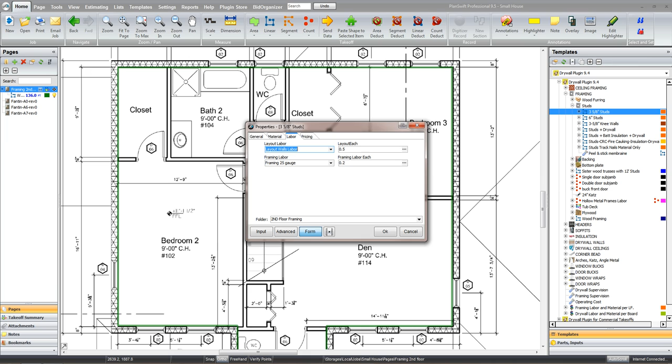I'm going to use this 3 5/8 assembly and name it interior walls. The walls are 9 foot, the studs are 9 foot, 16 inches on center spacing. I'm going to use a default track and studs, and the labor at 25 gauge. Click OK, and I'm going to digitize the walls.

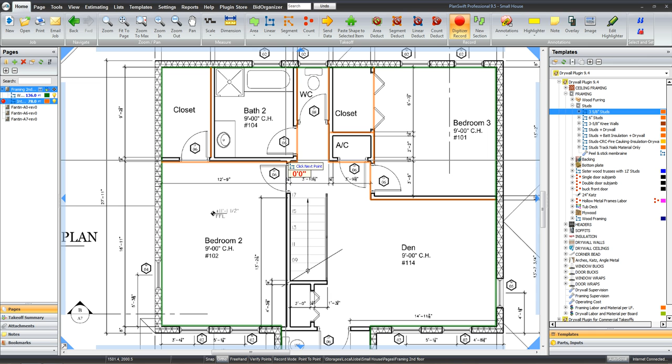With PlanSwift 9.5, we can use a digitizer, a linear or a segment. By double-clicking, I can just go here and make this a segment takeoff. Left-click, double-click, left-click, double-click. Or I can just do a linear takeoff if I want to go around the whole thing. Hit my escape button, and my framing takeoff for the studs is done.

Now my backing - I'll expand the backing folder and grab the backing material assembly. Click OK. I'm going to digitize the sink here where I need some backing, and the vanity here, and that's the end of my backing.

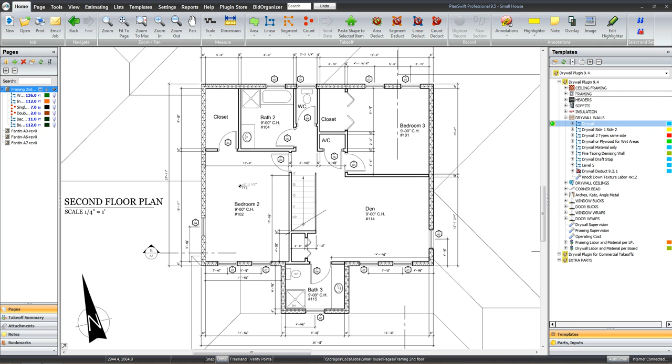Now I'm going to do my drywall and my walls. I'll click on this green start button, record button, and drywall. I'll hit home - let me just say that's my drywall walls. Let me click back here.

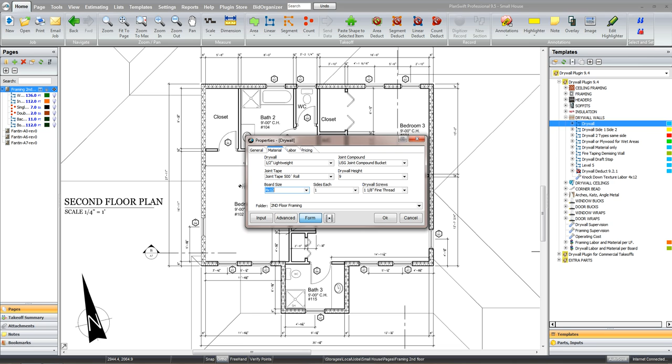Walls, drywall walls - the material, let's say we're just going to use 1/2-inch lightweight drywall. I'm going to use a joint compound, USG joint compound bucket, 500-foot roll of tape. I'm going up 9 foot with the drywall, 4x12 sheet, and I'm going to use one side. So I'm going to click OK, and I'm ready to digitize it.

If I go down here to my record mode and click point to point and turn it to box, I can just do it really fast and go into each room that is either a square or a rectangle. I can use this box tool.

Now I'm going to turn it back to point to point so I can go around this living room or den area.

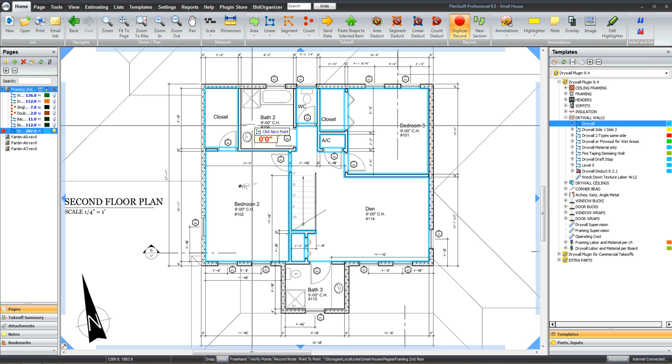I didn't go into the bathrooms because there's different board used in the wet areas. Double click to release that. Now I have my 2 bathrooms to do, so let me go in here and look at this bathroom.

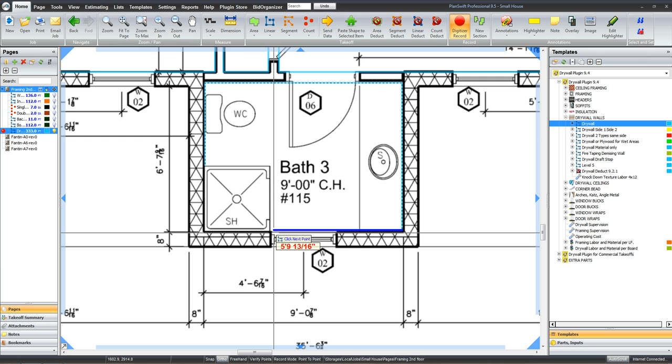I'm going to start here with regular board, the 1/2-inch lightweight regular, and just go to the tub. Then I'll do the same thing with this bathroom, starting at the shower with regular board. I can either use DensShield, Durock, or moisture resistant board in the shower wet areas.

So I'm going to hit escape and go over here. I have an assembly that's drywall or plywood for wet areas, so I'll just use that one and call it drywall wet area. The material is going to be the 1/2-inch Durock in the showers.

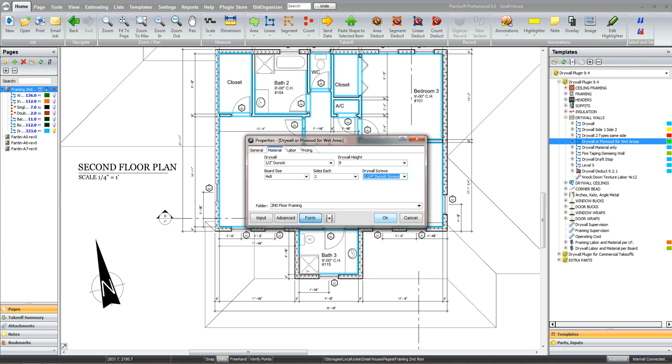So I'll pick 1/2-inch Durock, going up 9 feet, 4x8 sheets, doing one side, with Durock screws. I'll do this in my wet areas in the shower, and the shower here and the tub.

Hit escape, I'm done doing my drywall. Another 6 or 7 minutes. Now let me do the drywall on the ceiling.

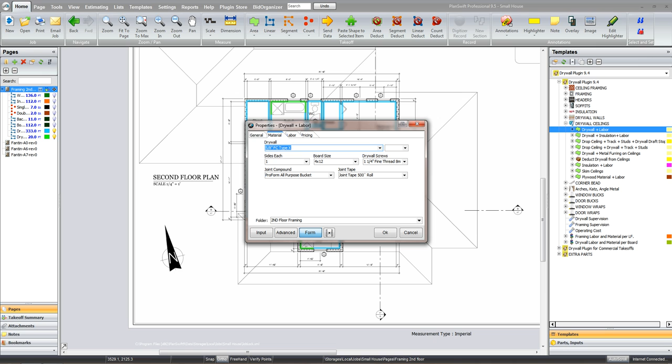We use this assembly here, drywall and labor, and I'm going to change the name. I'm going to name it ceilings, drywall ceilings. I'm going to pick 5/8 type X for the ceilings, and all this is right, so I'll click OK.

I'm going to turn off this box and put point to point again, and then I'm going to just digitize the whole ceiling at one time. Double click, I'm done. Now I'm done taking off my drywall.

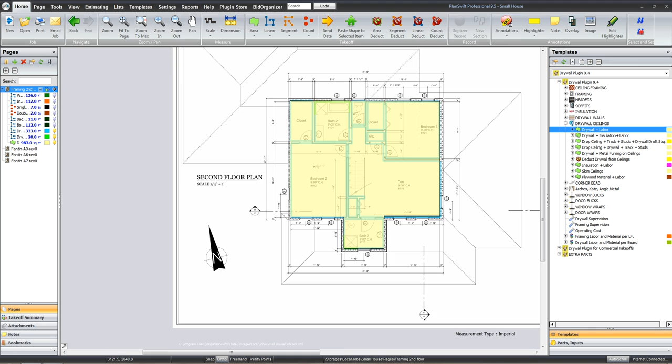So here we are, 12 minutes into this video, and I've done my furring, my metal studs, and my drywall, and I'm done with this takeoff. Now let's take a look at the reports and how they work, and how I can break all this material into different folders.

I'm going to click over here to my estimating tab, and I forgot to make a drywall folder to put all this drywall in. So I'm going to add a new folder, click new folder up here, and I'm going to say second floor drywall.

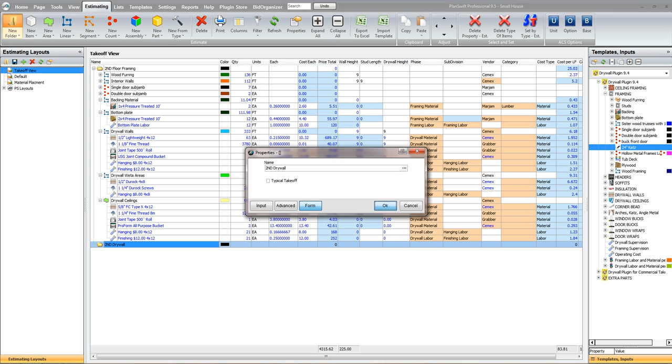Now I'm going to drag and drop all these drywall parts into this folder. I should have done this when I started the digitizer before I did the takeoff — it asked me what folder I wanted to put it in. I like to put them into folders because now I can do my reports.

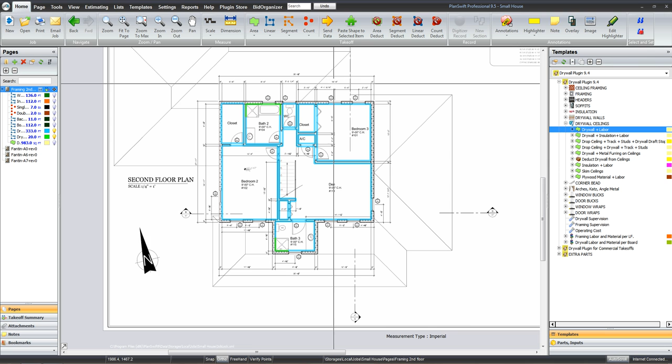And you can just go through and use all of the parts. I didn't use any corner bead in my Drywall Takeoff, but you can. I'm trying to keep this video short in time, but let's just take a look at the corner bead real quick.

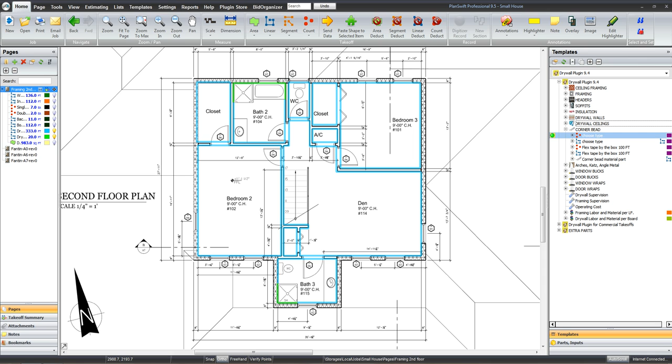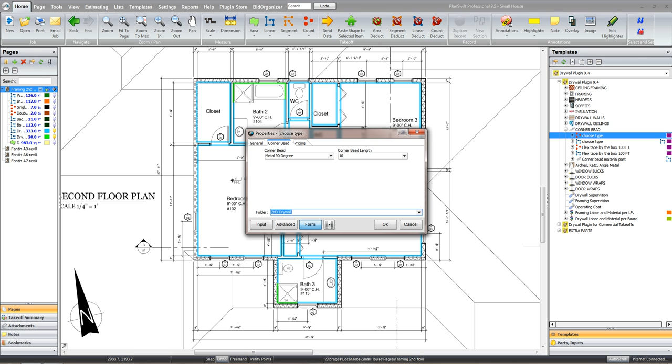I can choose my corner bead here, as a point count or linear. So I would do it as a point count, and I can call this corner bead, let's say stand up corner bead, and then pick your corner bead, whatever one you want. Metal, 90 degree, 10 foot. It's 9 foot ceiling, so I got to use 10 foot bead, and I put it in my folder. See, here's where you put it in the folder. Second floor drywall. Click OK, and let me just go over here and count my corner bead real quick.

Let's see, I have one here and here. These stand-up pieces would go here for the legs. I got one, two here. Do the stand-ups. The corner bead for the window, I would just click 3 on every window. It doesn't take that long.

You got to do a little estimating. I don't know how to build the part any faster than that. But you can figure out if you want to just do 2.5 clicks, or 2.5 pieces. Sometimes you might just want to put 2 sticks by the window.

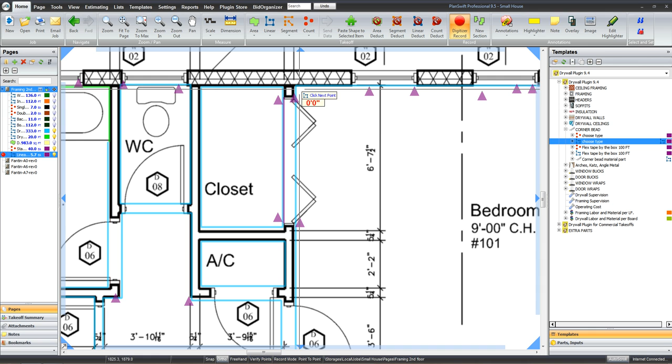Now I'm going to hit escape, and I'm going to grab the linear corner bead to do the linear part, just to show you that real quick. I'll just say linear bead, and we'll do the same 90 degree metal, 10 foot sticks. It's framing. We're going to put this in the drywall, second floor drywall. And now in my linear, for these bifold doors, I'm just going to do it like that. And this will tell me how many 10 foot sticks I need. And that's a corner bead. And that'll show up in your reports as well.